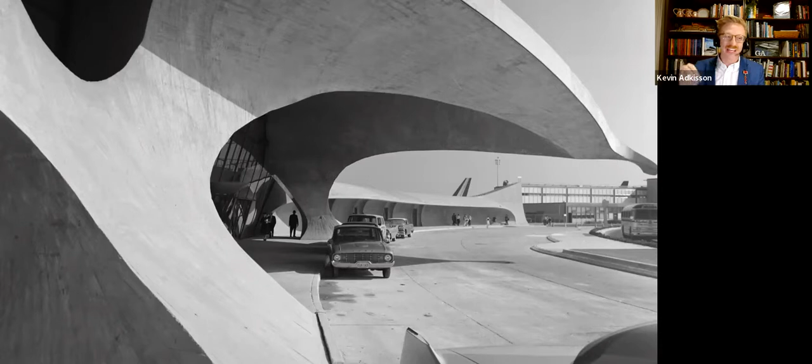As you get out of your car, you are sort of passing 1950s tail fins into an architecture that is equally swooping and curvaceous. The concrete formwork is left exposed, and you get a sense of not only how the building is put together, but also just the sheer weight of this great concrete bird. There's a New Yorker cartoon where two pigeons are sitting looking at a sketch of the terminal and it says, 'Poor bird, too heavy for liftoff.' And so you understand the sort of compressive force of the building as you move towards the front door.

In most of the PR material, TWA advertised that it was just one door from car to plane. And when you cross this glass threshold, you go from the swooping, curvaceous exterior language into an equally swooping and curvaceous interior language.

The building is predominantly a concrete structure, but inside there is a mixture of concrete, sheetrock, plaster, and wooden construction. Yet as a visitor you'll never really know the difference, because the interior has been entirely sheathed in millions of tiny Japanese marble tiles about the size of a dime, creating a uniform surface. This creates a total effect of uniformity across the walls, the floor, and the furniture.

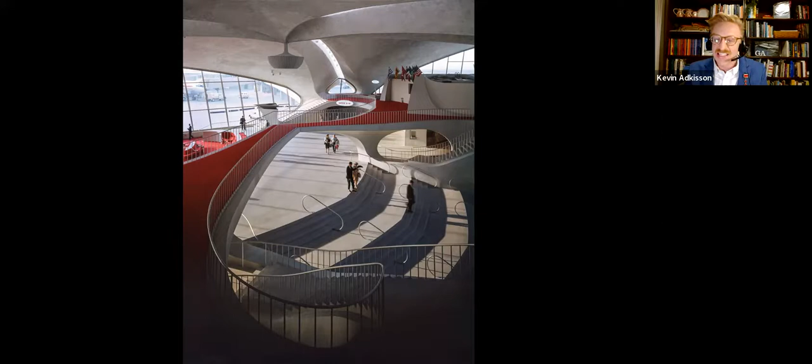But Scully would later reevaluate his opinion. In a lecture about the TWA Flight Center in the early 2000s, Vincent Scully said that the genius of what Saarinen is doing here is he's making, quote, those about to fly move calmly and intelligently from the tin can of our automobiles to those other tin cans out in the field, in order to be shut up in and flung out into empty space. What an irrational series of actions.

Anything could happen at any time. Scully says that the bravest people of the Middle Ages would never dare step onto a little airplane and go across the tarmac. What Saarinen is doing here is, in fact, steadying us for the journey. In Scully's words, everything about TWA Terminal says, you can do it. It's going to be wonderful up there.

I think there is this sort of optimism of not just the immediate journey, but the entirety of the American century. The building has an enormous sense of positivity and of grace and of beauty with this idea of the modern jet age.

Now, from the second floor of the building, you can look back down onto the check-in desk, or you can step into the Ambassador Club, which was the only interior that Eero Saarinen and Associates designed for the building. Coordinated by Warren Platner and working with Knoll Associates, we see a Noguchi-like fountain at the center with custom Eero Saarinen seats around the edge.

Elsewhere, Raymond Loewy designs a series of bars and restaurants like the Lisbon Lounge or the London Pub seen here. They are named after places that TWA could fly you, and they have a certain international flair. Now, below these lounges are some of the very first baggage carousels to ever be implemented in a US airport.

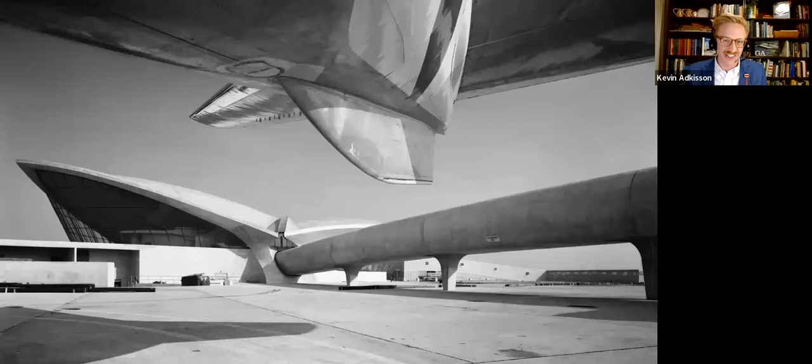Once ready to fly, you take this concrete tube, this windowless chute, out to the plane. TWA's own PR department called it 'the tunnel Alice followed to Wonderland—the flight center walkway leads to the excitement of air travel and distant lands.' You end up in what was called a satellite, also designed by Saarinen, featuring the same built-in furniture and tiles, then head out across the jetway toward your jet engine, given a last glimpse back to the flight center. The entire process is this incredibly theatric, dramatic allegory of flight.

Inside the plane, it's hard to differentiate TWA from any other airline, and hard to differentiate one bus-like row of seats from any other. So what Saarinen has given us is this entire journey from the car to the plane that is probably going to be substantially more exciting than the actual flight.

One New York City cab driver told a critic visiting the building, 'That's not just a building, Mac, it's a feeling—you get inside and you feel like you're floating.' There was a universal appeal; you didn't have to fly TWA to see the terminal, and about 50% of visitors in the early days were just there to see the building. It was a sensation and an experience.

Now that we've seen the building, I want to focus on what Eero Saarinen's office was like while actually producing this building, because they transformed the way modern architectural offices worked on design. As I've mentioned in other lectures, it was a brutal place to work—some 100 hours a week—and most people lived on their overtime.

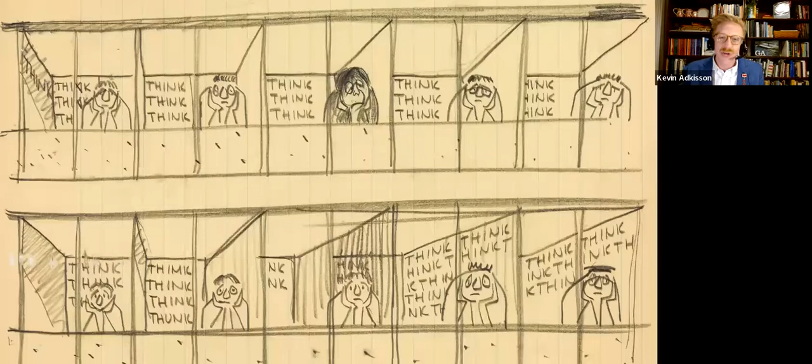In 1957, Eero hired a full-time cartoonist for the office, MIT-educated Swiss designer Claude de Forest, who documented such tortured activities as every architect sitting in their little office thinking about their IBM project.

For as much as everyone was overworked and over-intellectualizing all the buildings, it was also a transformational time in how they were thinking about buildings—they transitioned from using drawings and sketches to working with models.

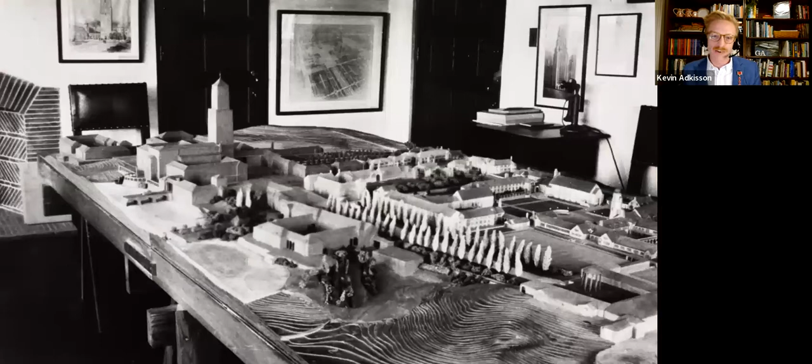Models had been used by Eliel Saarinen and Loja Saarinen when representing the Cranbrook projects. Here is a model made by Loja and her son Eero of Eliel's designs, but these models simply showed buildings that had already been sketched.

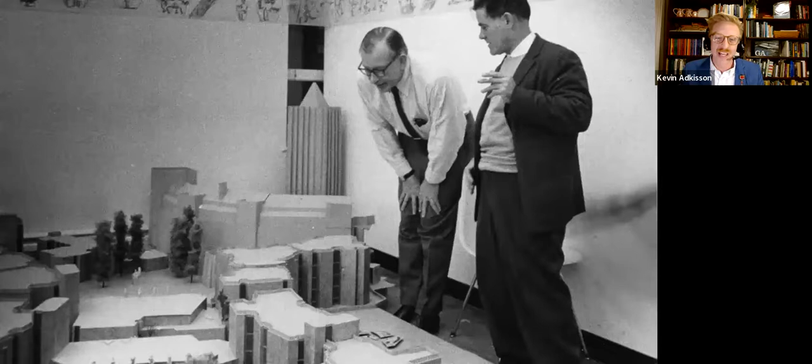What changes with TWA is that the building is never sketched—instead the architect and junior associates work entirely in a model. Everyone worked with models, and young architects were jokingly called the fledglings, referred to as cardboard cutters. Models were made of paper and chipboard, and they were really working devices, not meant to show the finished product or to show the client what the building would look like.

They were used to help design, like Eero here working on Morse and Stiles Colleges, or here cutting up the model of Dulles Airport to figure out the design in three-dimensional form. The models became increasingly large, and they had a system of cardboard and mirrored periscopes and rolling wheelie chairs where they would roll through the projects and peek in with a periscope to understand the architectural space.

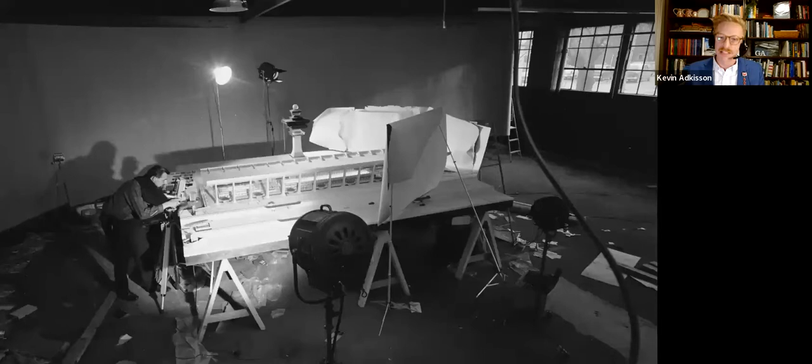As designs were refined and iterated, they were documented by photographers like Richard Knight and Balthazar Korab, and these photographs could then be used to showcase the building to the client. As the projects got bigger, the office moved locations—first above a gas station on Woodward, then to a former Jaguar dealership on Woodward.

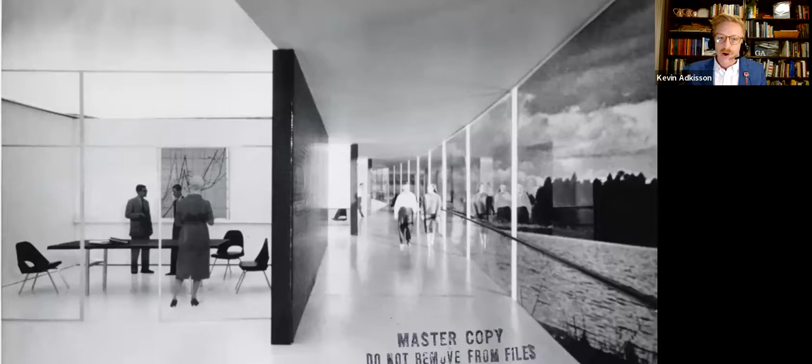And these model photographs were really quite effective at showing the design of the building. While the mostly male culture of the Saarinen office was working on these models, we also have the continued influence of Aline Saarinen.

I'll talk more next week about how Aline really served as a foil to her husband and transformed Eero's professional practice. She quit the New York Times in 1955 to become head of communications at Eero Saarinen Architects. She hired Pat Burley as an assistant to organize the photo collection and manage press inquiries. Aline begins to arrange engagements, lectures, publications, client meetings, and social events for her architect husband. She really helps transform Eero Saarinen into one of our first architect as celebrity, or what would come to be known as a starchitect.

And I think a tribute or testament to the success she has is when Jacqueline Kennedy invites the Saarinens to the inauguration in 1961.

Now, the office wasn't all work. They had enormous parties with favorite games like listing your 10 favorite architects and then defending why those are the best. They also threw parties for the old architectural models, whether burning them in a bonfire, or one of my favorite parties I wish I had a photo of, where the TWA models were used as chip holders and silver awards from the project were used as the dips. They didn't think to save the models because they were working devices, so none of these models survive.

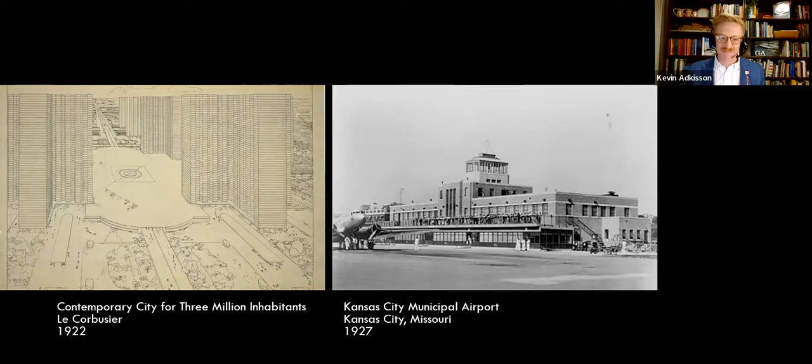You can see in Le Corbusier's vision, on the right, he has this circular airfield surrounded by towers in the park, and on the left, the business district. It was an ideal vision of the future where air travel would be intimately connected to the very city that it served.

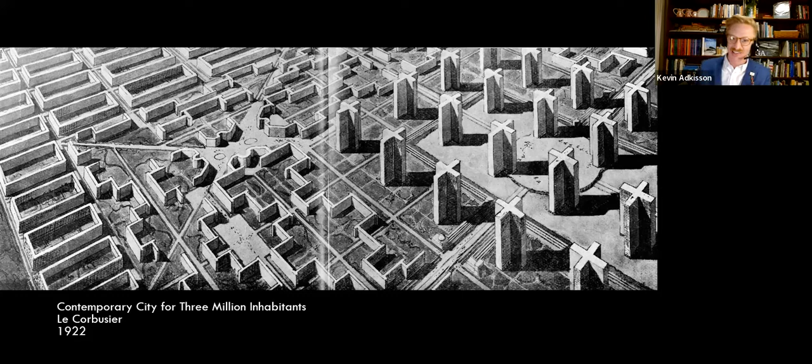Closer to home, Lloyd Wright, the son of Frank Lloyd Wright, proposed a circular airfield for Los Angeles, where airplanes would take off in any direction across a circular field and then land at a huge circular terminal built in his father's prairie style.

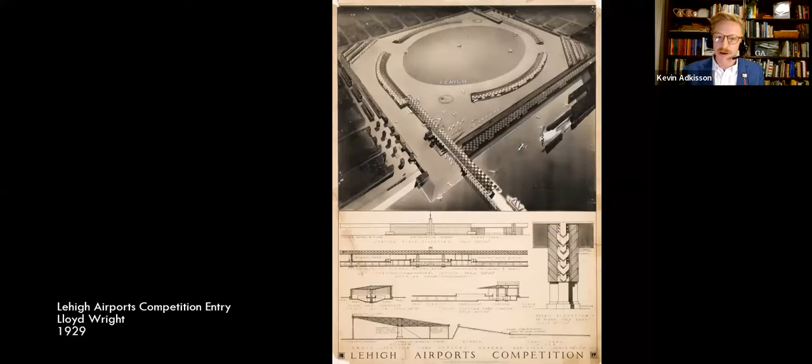This circular airfield, which many different architects envisioned, would become a reality in what is considered the first modern airport, Tempelhof Airport.

This was commissioned by the fascist government, and there is an association between militarism and aviation, where the technology that allows the jet age, that allows commercial flight after World War II, is coming out of the war. So while Hitler and his architect Albert Speer envisioned this as a gateway to a horrific vision of Berlin, it does serve as the model for most post-war airports.

Tempelhof uses a system where a large public plaza leads into a series of offices and hotels, and then a huge terminal, the largest airport in the world, leads immediately through to the airfield, where airplanes, seen here during the Berlin airlift of 1948, US planes are taxiing under the actual terminal, under this huge roof, solving the problem of how you get from an airplane into the terminal, which will become Eero Saarinen's great challenge at TWA.

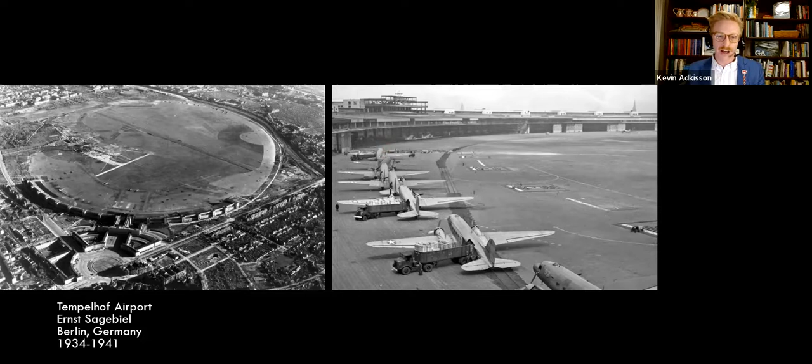In New York, Mayor LaGuardia opens the New York Municipal Airport in 1939 with a rather conventional classical Art Deco building by his favorite architects, Delano and Aldrich. The classical language of the architecture has an innate contradiction to the modern travel of air behind it. LaGuardia's airport was the vision of the future for New York air travel, but it quickly became too small and too limited for future expansion.

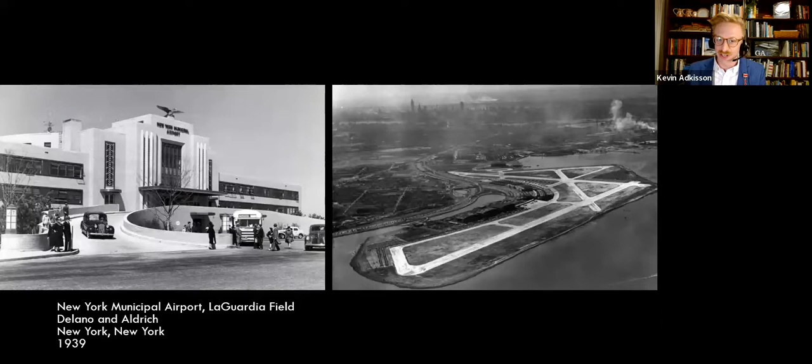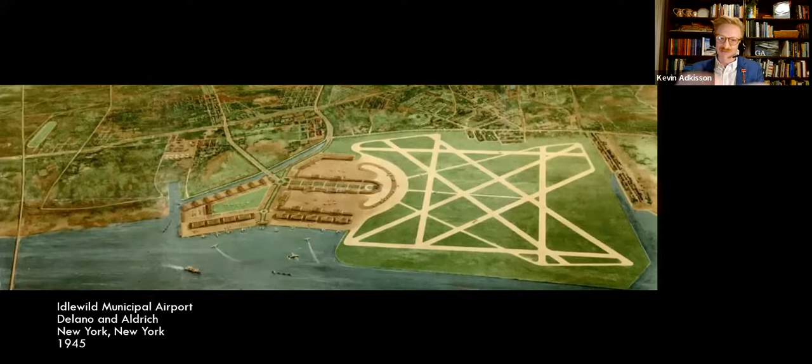So LaGuardia commissions Delano and Aldrich to build a new airport on 6,000 acres of golf and marshland. LaGuardia will be voted out of office in 1945, and the next mayor looks at this classical Beaux-Arts Roman scheme of an airport and hires modernist Wally Harrison to come in and redesign what will become Idlewild Airport, JFK.

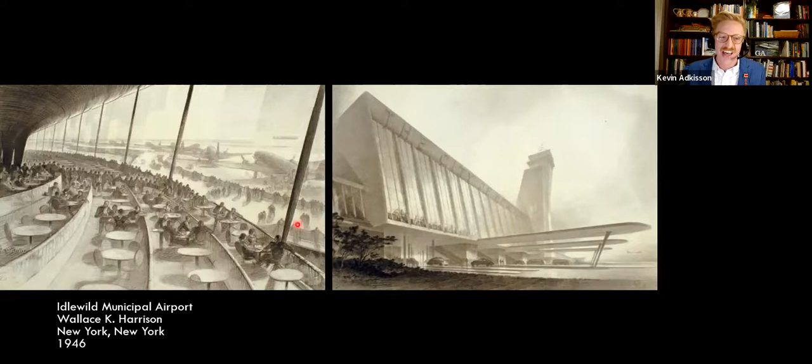Wally Harrison had been associated with Raymond Hood in the design of Rockefeller Center. He had worked on Radio City Music Hall and the United Nations building. He's a foremost New York modernist, and he proposes here a terminal where you would drive in on the highway underneath the building, be whisked up by escalators into a massive arrivals hall, and then sit and watch the drama of the airplanes along a huge Baroque peripheral building.

You can see this Baroque shape, this amoeba shape. This is all one single building with 86 planes docking alongside it within a radial system of runways that allow airplanes to take off in any wind condition.

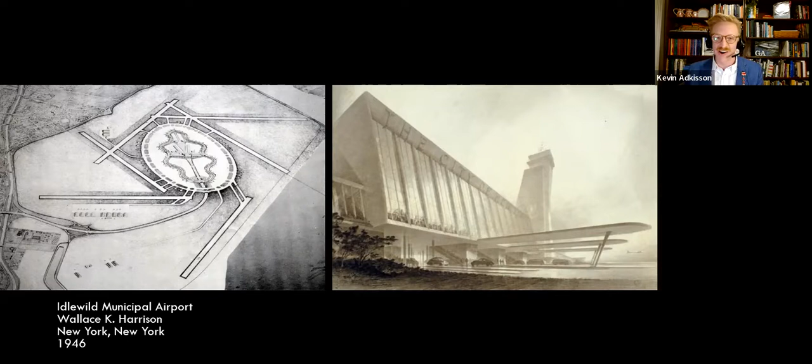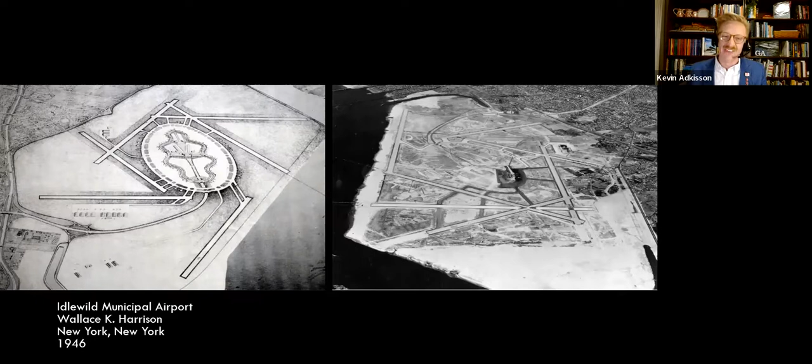Construction began on this project without funding for the building, so a temporary terminal was placed in the middle of these radiant runways before Wally Harrison redesigns the project on the suggestion of New York City, the Port Authority, and the airlines. He calls the idea Terminal City, and in 1954, the Port Authority of New York decides it will build the International Arrivals Building, and then individual airlines will build, like a shopping center suburb of air terminals, individual buildings around a central garden, Liberty Park.

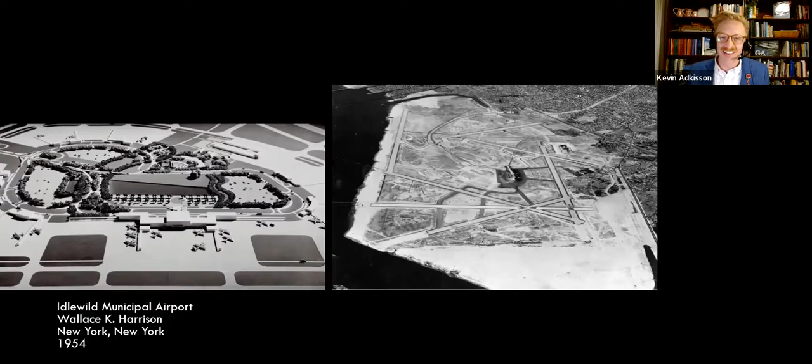Now, the entire thing will be connected by the Van Wyck Expressway, and we see here in 1958 the start of Terminal City. Now, in the center is this sort of Palace of Versailles garden that quite quickly gets paved over for additional parking. But the first buildings that open are the International Arrivals Terminal.

Designed by the august modernist SOM, it features a sort of functional glass and steel building in the manner of Eero Saarinen's General Motors Technical Center. Its most distinguishing features are the control tower and this arched arrival hall, which is a very simple steel arch with concrete reinforcing. It is successful without being particularly inspiring. This is what the government has paid for.

But when it comes time for the individual airlines to build their building, Wally Harrison envisions that they too will do some sort of streamlined, efficient, modest architecture. But we are in a new age. Mad Men, Madison Avenue has taken over, and these airlines know that whatever they build in New York will become an ambassador of their brand, an extension of their airline's identity.

It's part of a larger process in the post-war period that Architectural Forum calls the corporate showpiece movement, which started with the Lever House, where the soap company builds a giant glass building that they wash with Lever soap, or where Alcoa Aluminum builds a skyscraper out of aluminum, or Inland Steel sheathes their building in stainless steel. It is an idea that a company's building is a component in their corporate marketing, and that the corporate image is also the building's image.

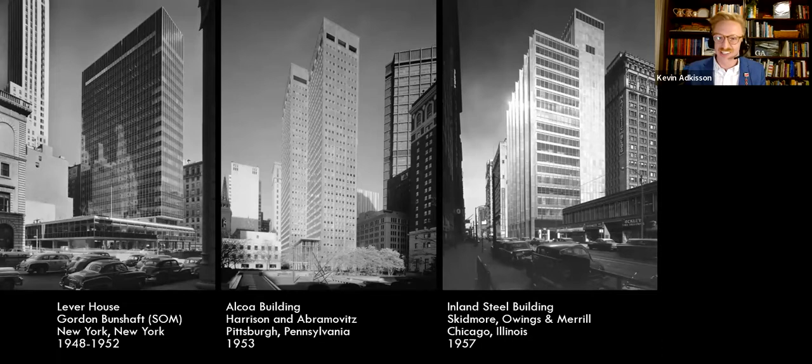It extended from large buildings, large corporations like these, down to individual companies where McDonald's becomes iconic for its use of this version of mid-century modern architecture to associate the hamburgers with this building. And it is a way of organizing corporate communications, of using architecture to sell your product, like the 76 gas station, where the sweeping curves of the architecture—how could you not fill up here versus a much more mundane building down the way?

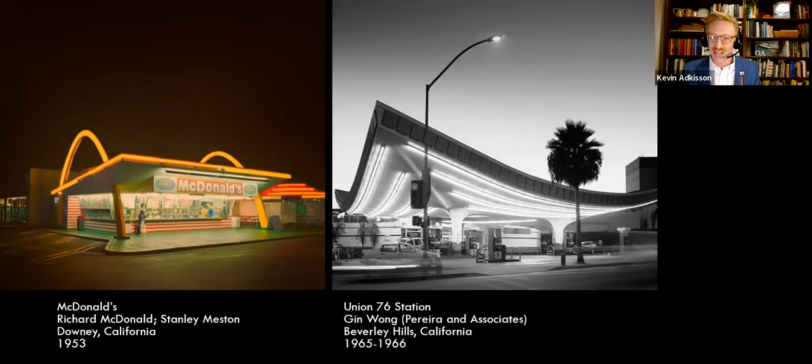Eero Saarinen is probably the most celebrated figure of this corporate architectural turn. And he had already created buildings like the General Motors Technical Center, where the car and the building are a unified expression. Or in Moline, Illinois, where John Deere, a maker of tractors that sit out in the landscape, occupies a headquarters of Corten Steel sitting out in the landscape. Or IBM, where the blue surface pattern is coming from IBM's punch cards that they're using inside, now expressed on the building.

So for TWA, how they actually choose Eero Saarinen—it is not the president of the company, it's not Howard Hughes, it is in fact the head of the PR department who suggests Eero Saarinen, because he says that air travel must be marketed like a consumer product, just as if it is a cake of soap. And so he wants an architect who can give him a differentiated signature building.

At the time, 1956, when Eero is commissioned, TWA is most associated with its Lockheed Constellation. This was the airplane that TWA had invested in during World War II, and they were the first to take it into service in 1943. It was iconically associated with TWA, and as the jet age arrived, TWA missed the mark. They did not order any Boeing 707 or Douglas DC-8s, and so they were stuck with these older planes, and they were searching for an architecture that could replace in the public's mind the Connie constellations for a new expanded market.

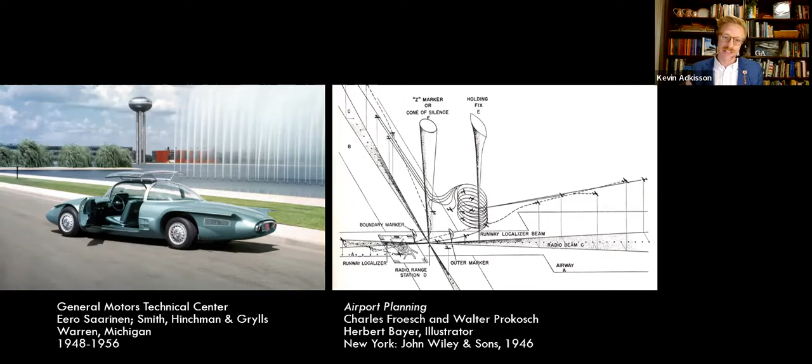He's really limited to one book, because there is only one book on airport planning: Walter Prokosch's Airport Planning, which is the guideline for what a jet age airport might be. Saarinen realizes that TWA, in their guidelines of what they want in a terminal, have copied word for word, plagiarized, what Walter Prokosch says should be an airport. So Saarinen realizes that his client doesn't really know what they want, and it's up to him to discover how the architecture will best serve TWA.

Saarinen, who was always traveling, starts doing research. As he travels, you can see him here putting a stopwatch into his coat. He is taking detailed notes of the entire process of air travel. As he goes around the country, he measures not only airports but also train stations. How long does it take to get places? He hated being delayed in that liminal space between the car and the airplane or the train. So he would time how long it takes to land, to taxi, to deplane, to get your bags, to get into the cab. And he uses this analysis in the design of the TWA terminal.

They create some 40 pages of documents detailing everything that will help in the transformation of airports, transitioning from facilities that handle airplanes to facilities that handle people.

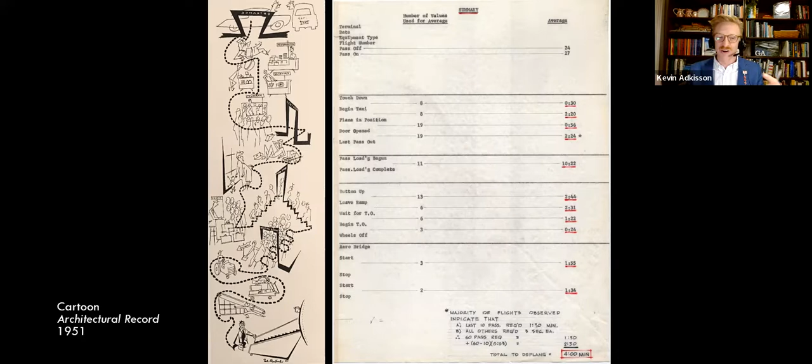He realizes in his travels and research that airports are terrible, and everyone knows it. Here's a cartoon from Architectural Record that shows the drama and trauma of moving from the car to the airplane, as our little figure moves from top to bottom, tumbling and becoming more disheveled, until from outdoors he climbs into the airplane. One critic said, in the air the consumer may be treated like a king, but on the ground he has to fight his way through a chamber of horrors. There is just a great level of disorganization in modern air terminals.

It's really a way of managing people. And we can see how at TWA, as we walk through it, those flowcharts that Eero Saarinen drew in research become exactly every stop as you moved through the TWA terminal.

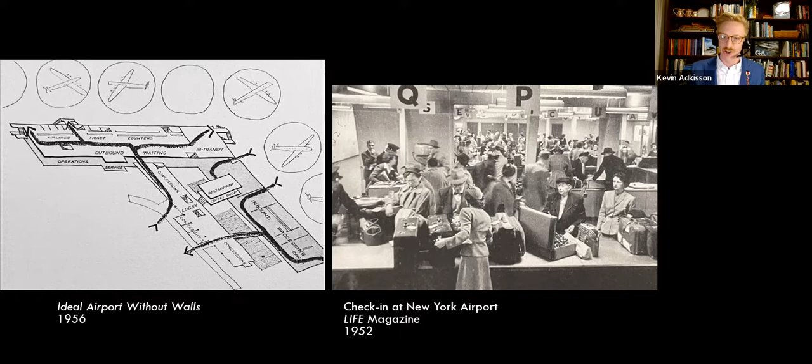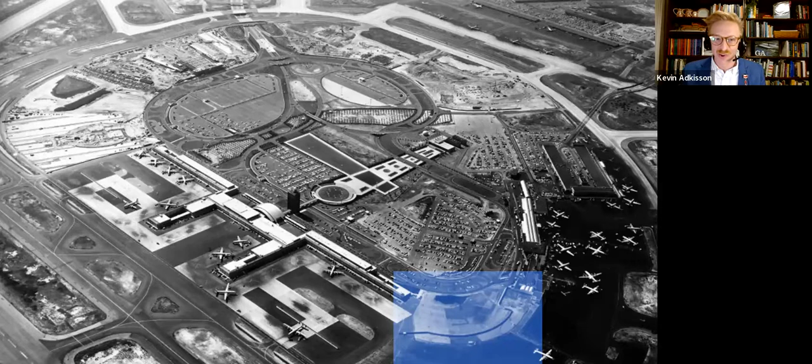When he is given the site, TWA was a little disappointed because they were here in a corner. But what Saarinen liked about this corner was that he had both a more dynamic street frontage, because his building would be entirely along a curve and not a straight part of the road, and also it would be directly on axis with the entrance, which inspires him to come up with a fully symmetrical building.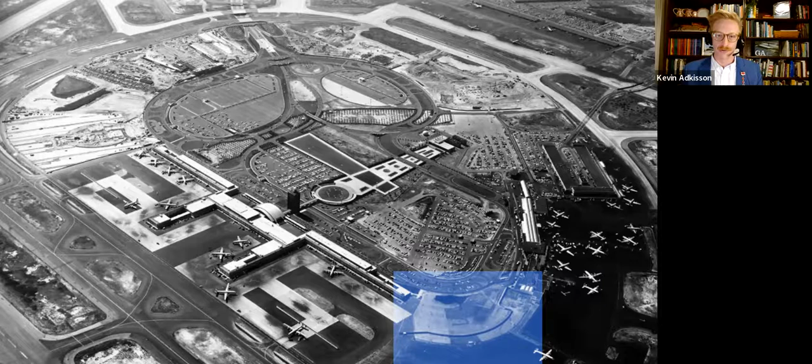Now, there's only one known sketch of the TWA terminal, but here we can see his idea of a large single roof that houses everything needed for the passenger terminal.

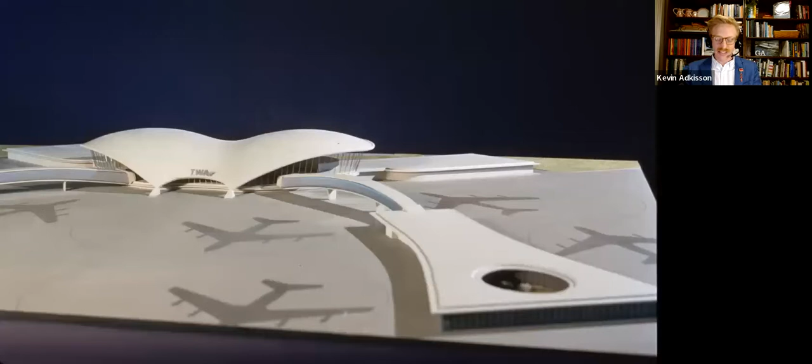He quickly transitions from working in sketches to models, and they create the first design in late 1956 with this monolithic, undulating, biomorphic roof that leads out on little piers to satellites that would allow you to board the plane.

As they're working on this design, Aline and Eero take a month-long trip through Southeast Asia. We can see here Aline on one of the propeller planes they used to travel to Southeast Asia. And in January of 1957, the Saarinens arrive in Sydney.

Saarinen was invited to be a judge for the new Opera House competition. He shows up and says, 'I'm late, my plane was delayed in Fiji.' And he looks at all of the entries and says, 'Is this everything? These are terrible.' He goes through all of the rejected entries and pulls out a submission from the Danish architect Jørn Utzon, and says, 'This is your winning design.'

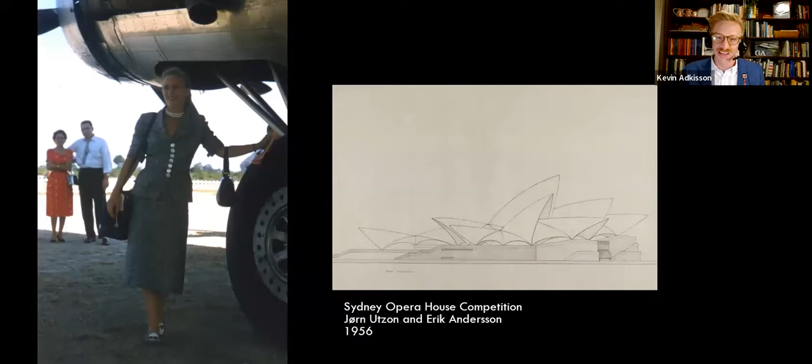But he has to convince the jury and the governor, and they are not compelled by this shape of concrete shells. So Saarinen, realizing the iconic value of this design, takes out his own set of pencils and redraws Utzon's plan to help convey what these large concrete thin shell structures would actually feel like as you looked at them in Sydney Harbor.

He convinces the jury to award the commission to Utzon, and Saarinen has really set out to create the iconic image of modern day Sydney.

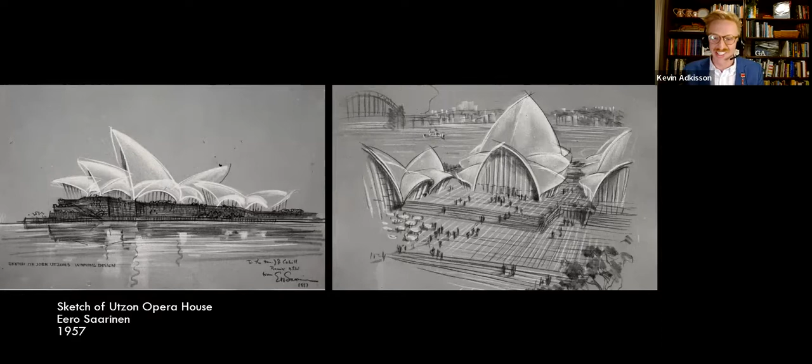On the flight back, he's thinking about Utzon's design, these thin concrete shells with their crisp folded edges, and about Norse helmets. As the story goes, he sits down to breakfast with Aline at their Bloomfield Hills house, and she asks him to describe how the work on TWA is going. He looks at his half a grapefruit for breakfast and begins to rip it apart, unfolding it into the shape of the roof.

He takes that little grapefruit to the office where they turn it into a clay model at 6 inches, then it goes up to 15 inches until they get to massive models. Here you see Eero and Kevin Roche working on the structural systems of how this complicated roof form might actually stand up. César Pelli becomes intimately involved in the project now, working again on these full-sized models.

They take the design to the executives at TWA, and Eero would later say he never thought the building looked like a bird. That was never what he was going for. He would say, 'If the public sees a bird, how wonderful. Architecture should convey meanings, but I was never envisioning a bird. I was envisioning structure.' However, in the presentation pamphlet for TWA, you can see it's not a rendering of the building, but a photograph of birds taken by Balthazar Korab that actually advertised this for TWA.

Now the company is enthusiastic, they approve the design, and Saarinen goes to his trusted engineers at Ammann and Whitney to create the structural system.

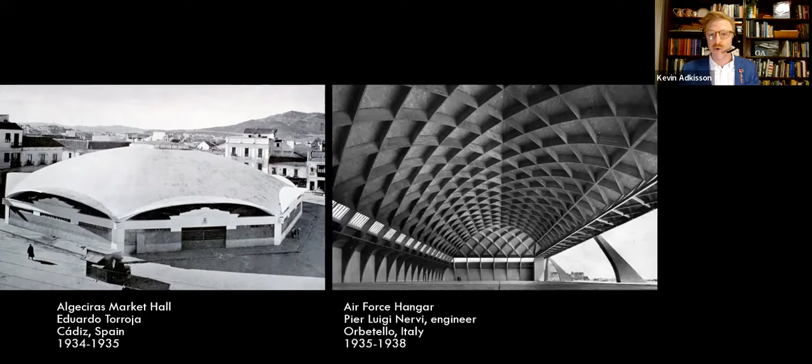What exactly is a thin shell concrete construction? They date all the way back to the 1920s, meant to span large volumes of space with a minimum amount of material and with no columns. Early thin shell constructions, like this market hall in Spain, are just 3.5 inches of concrete thick, covering 180 feet of empty space. Engineers like Nervi in Italy will transform the thin shell concrete construction into something much more expressive than just a concrete form, bringing a certain dynamism to the engineering.

Or in Mexico, Felix Candela becomes America's master of thin shell concrete construction with his churches, factories, and other buildings in these swooping catenary arches. Now, Eero Saarinen will say that yes, he's aware of these thin shell constructions, but he's also looking at designers like the Spanish-American Guastavino, who uses clay tiles coated in concrete to create thin concrete shells.

But the building Saarinen is most thinking of is probably the most famous airport in America at the time, the recently opened St. Louis airport, designed by Minoru Yamasaki. Yamasaki thought of his thin-shelled concrete vaults as parachutes, allowing light in between and covering this large clear span space. What Yamasaki was trying to do, and what Saarinen says he doesn't do, is create a vault that feels more like it's being held down than being supported. Eero Saarinen said this airport was grounded.

He wanted vaults more like those by the great English architect Sir John Soane, where you see the vault and it feels almost as if the columns are actually holding it in place instead of supporting it up. Saarinen says what Yamasaki has done are heavy grounded vaults, or domes, and if he wanted a heavy grounded dome, his at GM was better because it had a brick wall. That seemed to be the logical way for a vault to grow.

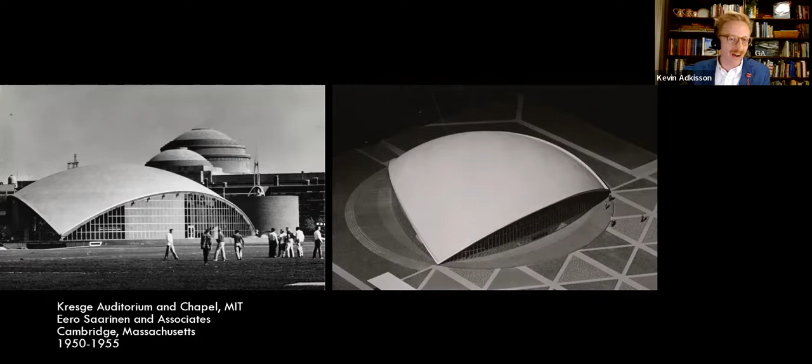And the problem is that the dome, if you look at these domes from the early 20th century, a dome wants to have a constant footing. It wants to land in a circle. And what Saarinen does is he has a very conventional dome up to this point, but then the forces of this concrete shell, this membrane, are going to start going all out of whack. And there's no way for the engineers to measure, without computers, which they don't have, the forces of what actually is happening here, how the load is transferring down to these arches at all of these different dimensions. And so the dome is not based on any sort of structural logic, and it in fact defies every known principle of membrane thin shell concrete construction.

And when they go to build it, it immediately starts to be complicated by the fact that the Saarinen have told their contractor to build it however they feel. They don't control how the concrete is poured. They don't control the method of the formwork's construction. It's poured in the dead of winter over 3 months. They allow the concrete to cure at each level, so there are cold joints of concrete going up. And they also are not able to sort of keep the concrete in this sloping position.

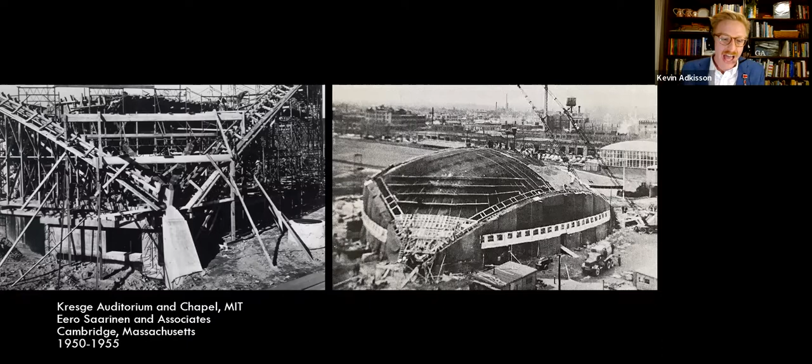And so when Harper's Bazaar comes to run a profile on Eero Saarinen, and they do this sort of heroic great architect piece, of course none of his circle, none of his team are in the photo shoot, but he is looking at this brand new concrete thin shell construction resting on these dramatic 3 arches. And what he doesn't tell Harper's Bazaar is that at the time of this photograph, he knows that the structure has failed. They start taking the shoring out of the building and it starts sagging beyond an allowable limit.

And so what they have to do is put in steel reinforcing under these arches. They did not get it to work where it actually supported itself. And so the principles of a thin shell concrete vault are no longer actually functioning here at the MIT chapel.

Now, Charles Whitney of Ammann and Whitney spoke at MIT in 1954 on the Conference of Thin Shells, and he said at the time, he just doesn't mention the project. And then he says that building has no general rule as to their justification. And I think Saarinen learns his lesson. He says the dome is too earthbound. He admits the structure didn't work.

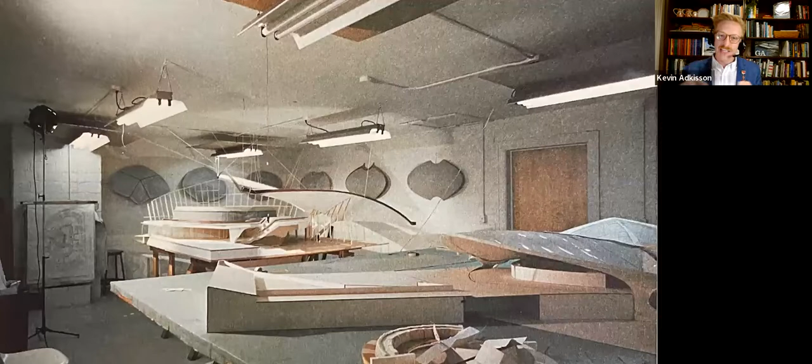And so when Abba Tor is looking at this building and saying, this is never going to work as a structural system, Saarinen gets angry. And then he says, well, what do we do? And Abba Tor begins to sort of bring himself into a full part of the design team. And the great change that occurs as they build these models is they split a monolithic roof into 4 individual sections. Those 4 sections then act as individual thin shell constructions that are supported on their own columns. And so instead of having one large sheet of concrete that is going to have immeasurable forces, they have sort of arches that are both arches and domes that they're able to actually run calculations on.

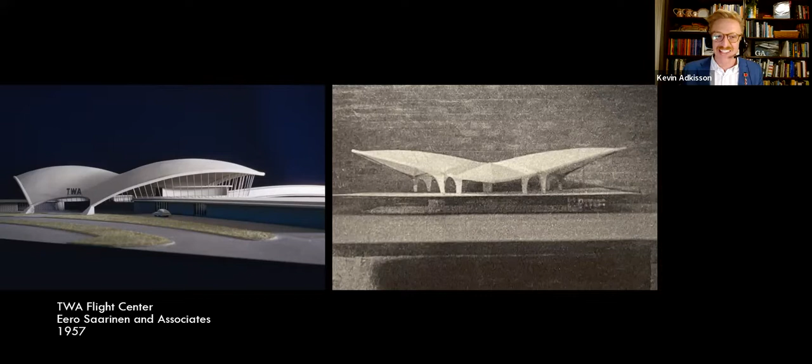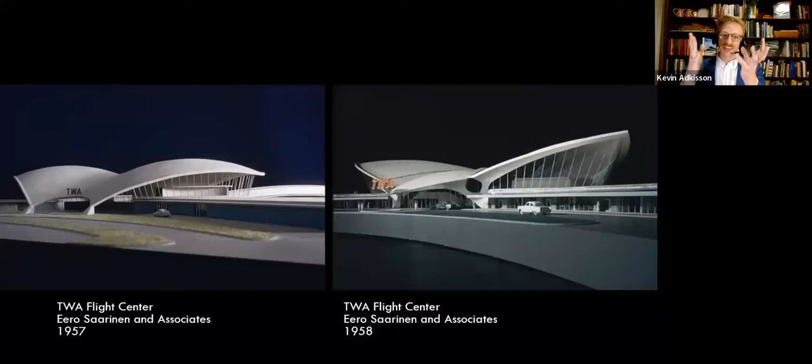The problem becomes how these suspended vaults or concrete shapes actually meet the ground. Saarinen called this the cockroach airport because of its 8 little legs. And they eventually settle on a series of just 4 points of contact where Y-shaped concrete buttresses will grow out of the earth and then support this entire concrete structure. And this is the sort of great gesture of TWA that makes the building both bird-like, but also seem like it is soaring out of the asphalt.

Now, the models are photographed and they are published, and the building becomes a celebrity in and of itself well before they have figured out, can they build it?

And if so, how will they build it? They take their models and the model photographs and slice them up, as Abba Tor says, like salami. They take these slices and do all their engineering calculations on a slice, then combine all the slices, and if everything equals zero, they think it should stand up.

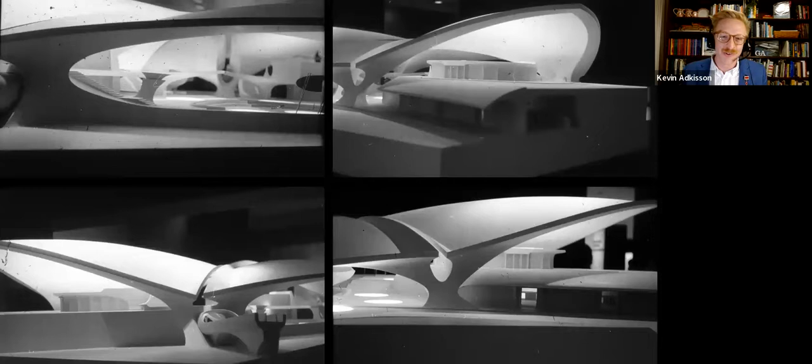Now they continue to refine the design of the building with these models. And as they do, Claude DeForest comes up with a whimsical little cartoon showing a traveler moving through the airport who, hitting these concrete curves, has become decapitated on his journey to the airplane.

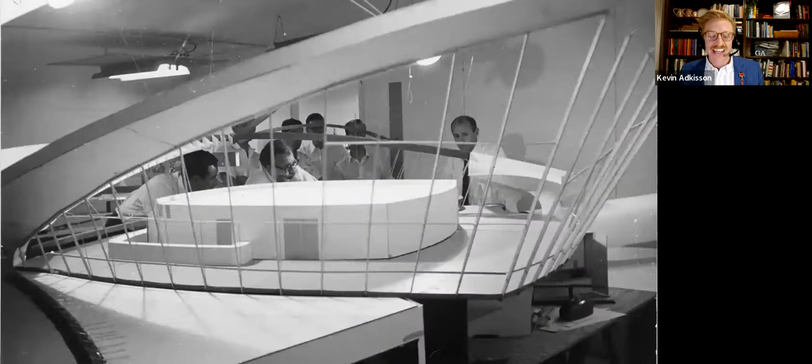Now the models themselves become how the structural engineers are able to create the design drawings. The Saarinen firm was working at full scale, working in the model. Here you see Saarinen's legs popping out of the model. As they would tape these sheets of paper, they would be photographed here by Balthazar Korab and sent to the engineers who would turn them into construction documents.

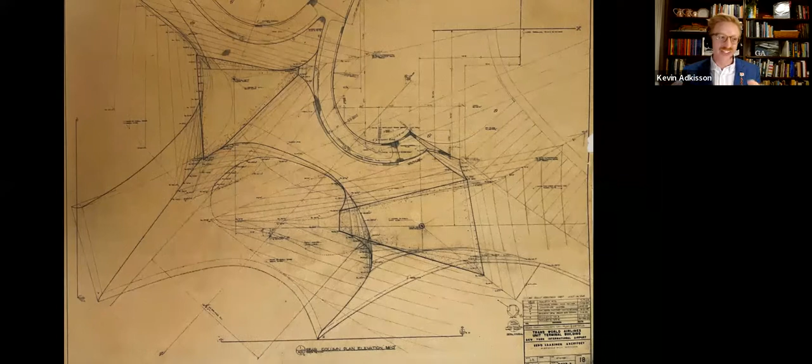Now, as a contractor looking at this drawing, I would have no idea what to do next. So the contractors Grove, Shepherd, Wilson, and Kruge have to approve the entire construction system before they're able to break ground. They end up producing about twice as many documents on how to build the building as Eero Saarinen and Associates produced telling them what the building should be. So they end up creating nine months of manuals on how to actually create this structure.

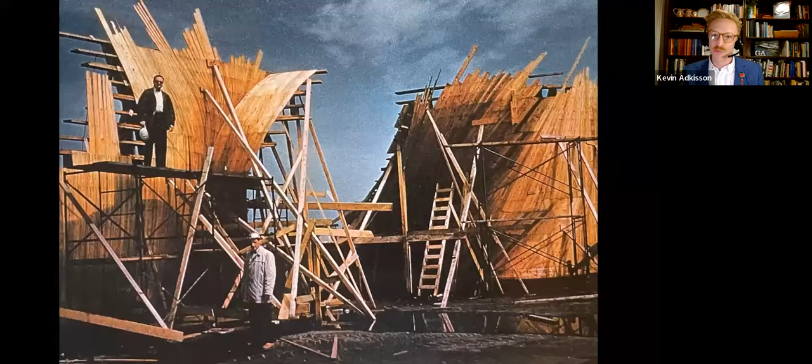So the first task of actually building TWA, after they have driven all the pilings—remember it's a marsh, so they're putting pilings into the earth—they're doing them at an angle because the forces from the roof will be coming down at an angle. Then they start building wooden formwork, using carpenters to create the entire air terminal in wood as the mirror image.

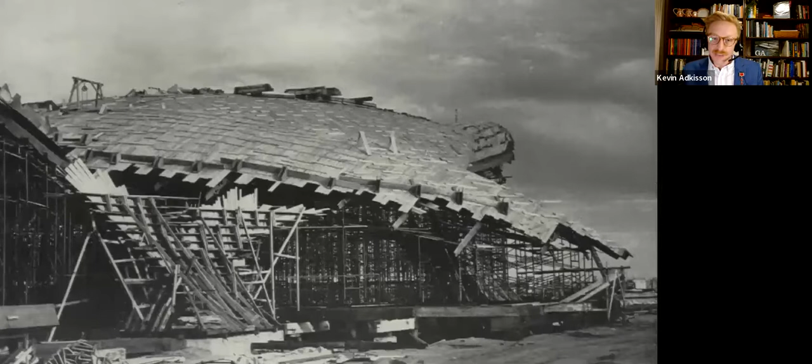Now there were no computers used in the calculations of the actual concrete structure, but there was a very early computer used to create the scaffolding. There were some 5,000 pieces of steel that supported this enormous wooden structure, which would become hugely heavy with wet concrete. And so the cost of the roof was about $15 a square foot, and more than half of that was from the formwork.

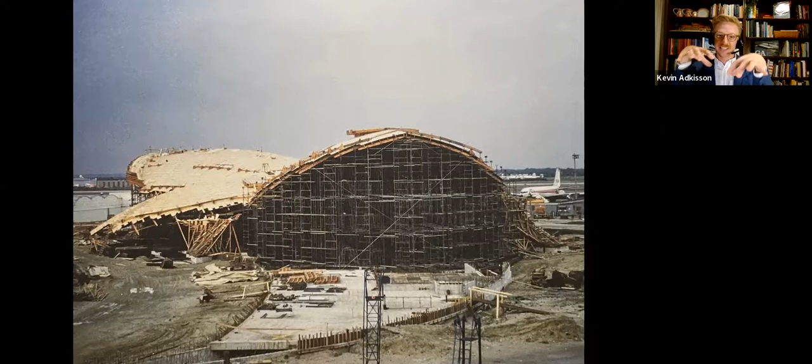They couldn't reuse the form because the whole thing had to be built at the exact same time, or it would fall over, because the four quadrants are connected and resting on each other. If they were to build one piece of the quadrant on that Y-shaped buttress and then try to reuse the formwork next to it, it would completely collapse without its counterweight of the other concrete part.

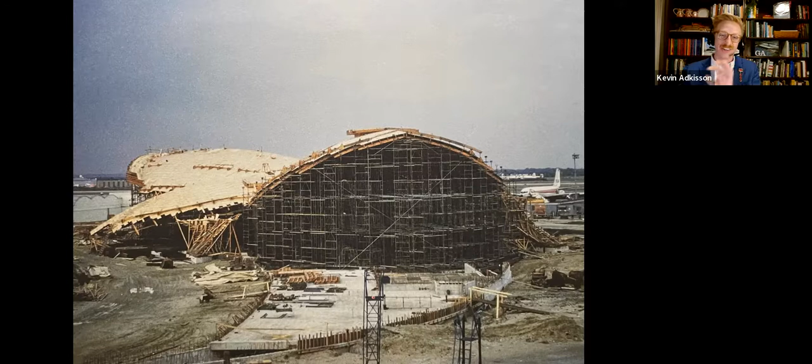Now the actual journey of building these 5,000 tubular steel frames, holding some 2,500 wedges on 27 different shapes, and then countless individual wooden pieces, was a multi-month process. It took most of the first year of construction to build the concrete formwork. It was then coated in shellac and marked with spray paint, telling you exactly what type of concrete mixture and how thick it should be at any one instance.

Concrete is incredibly strong in compression, but it has no tensile strength. You can't pull concrete. So you add steel rebar inside of concrete to give it additional strength. Here you can see the steel rebar, which was its own engineering problem, laid out on top of the concrete formwork.

Now John Dinkeloo was on site in New York. When he told Tor, he said, 'Abba, if you don't pour the joint straight the way Eero wants it, he'll have your head on a platter.' And Tor told John Dinkeloo, 'My head will do him no good on the platter. My head has to stay on my shoulders, not on his platter.'

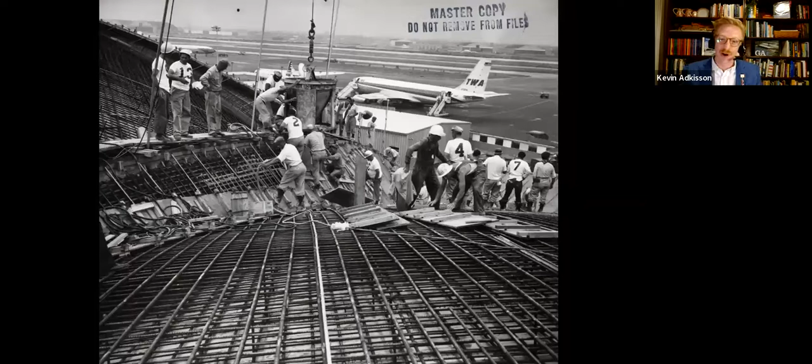He later would confide to an interviewer that, as the structural engineer, he thought this should work. Everything said it should work, but he didn't know exactly if it was going to work. And so when they start the concrete pour, it is a 120-hour straight process, because they cannot let the concrete dry from the start to the finish.

It takes 30 hours from pouring the buttress to pouring the top of the roof. They used a coordinated system where all of the workers in red and white shirts had numbers that told exactly what their role was. There were people with notebooks looking out and saying, number 4 should be right there at this exact moment.

Everything is going smoothly. The spray paint on top of the wooden formwork was complemented by spray paint on the buckets that told you exactly which bucket of concrete was meant to go where.

Inside, underneath the formwork, was a team of engineers who were looking at plumb levels, weights on a string, and watching how much those weights were shifting as the concrete is poured on top of the wood. They would radio up and tell the engineers above, it's too heavy on this point, we need weight on this point. Because everything was so coordinated, they could tell them exactly where the next bucket needed to go as the inside formwork is shifting under the weight of wet concrete.

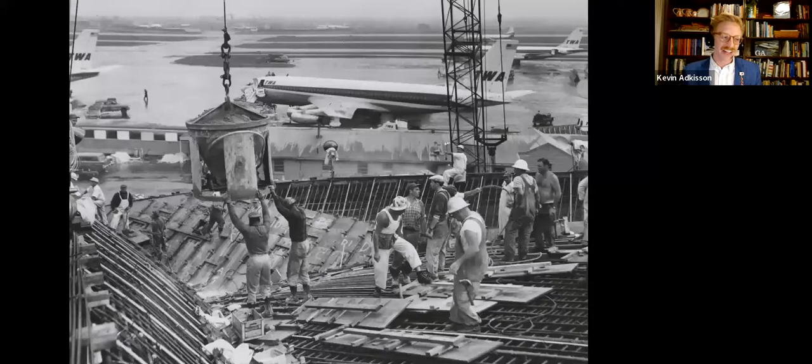They worked straight through the night under Klieg lights until they had poured all 4 sections. They finish it in September, and it takes until November for the concrete to cure. At the center is a 44-inch thick pentagon of solid concrete that joins together the 4 wings of the building.

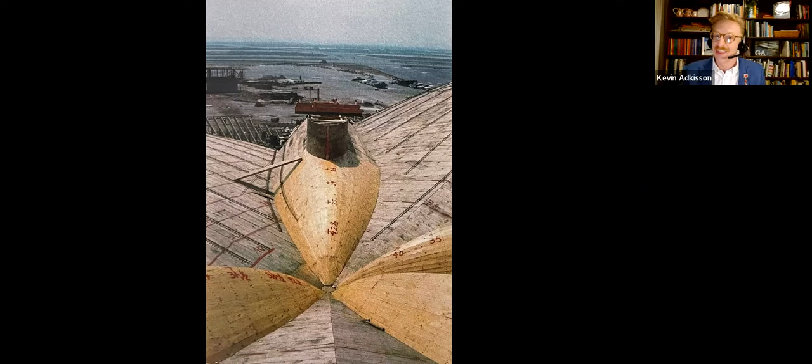When they get ready to take the formwork down, it is a process in and of itself because they have to measure how much the concrete is shifting and settling. Cracks had already begun to appear in the Pan Am terminal, and so JFK, the Port Authority, was very concerned with how this concrete monument, that no one quite knew if it was going to stand up, how it would work. They take the formwork down and you are left with this pretty incredible sculpture of concrete.

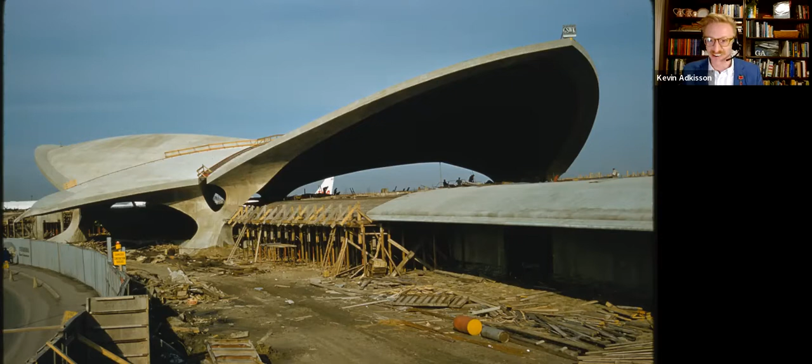It does stand up, and in the end, after 90 days, it has only deflected about 1/4 of an inch in places, 2 inches in others.

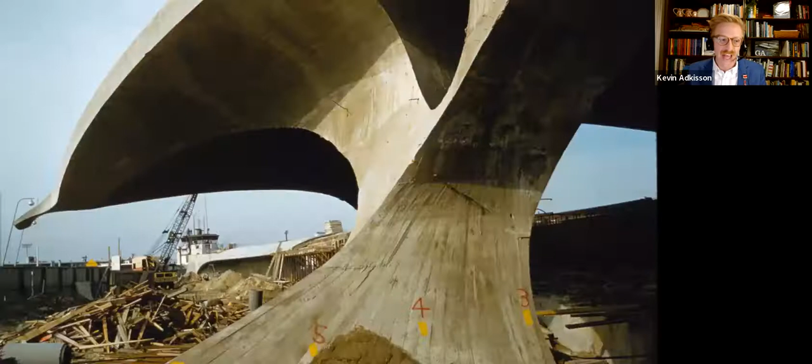As you get closer, you see the actual method of construction. You see the wooden formwork leading up to these wide buttresses. It's really just a pretty incredible sculptural form.

Eero Saarinen stood in this building in April of 1961, and he said, if they stopped right now, we would have a beautiful ruin like the baths of Caracalla. He looks at Abba Tor, his structural engineer, and says, if this were to fall on my head now, I would die a happy man.

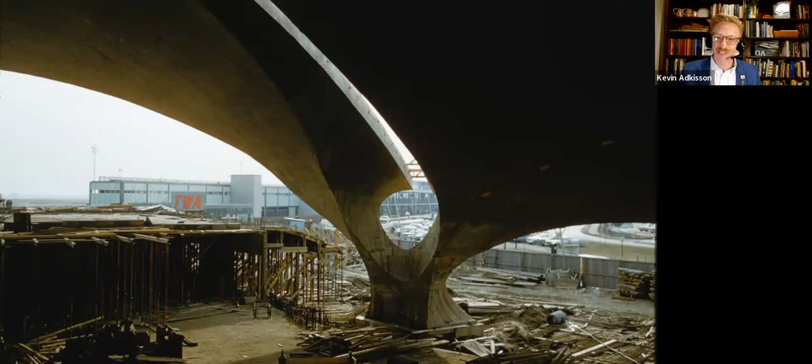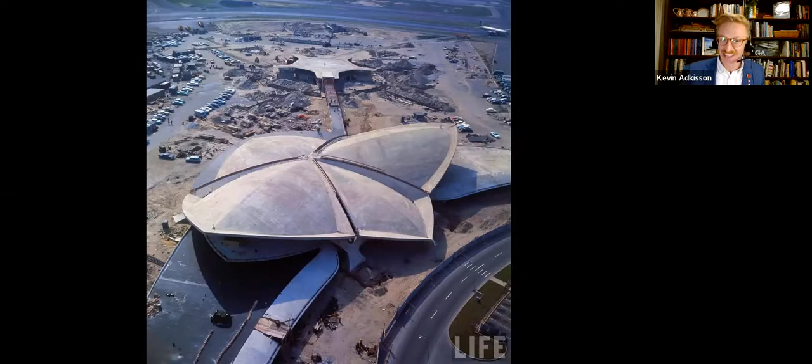Of course, it doesn't fall, it does stand up, and he is able to then continue the process of sealing the concrete roof with 1,500 gallons of silicone, and then outfitting the building with windows, asbestos spray on the inside for acoustics and fireproofing, and turning this large, not exactly thin shell - some places it's 44 inches thick - shell concrete construction into a building.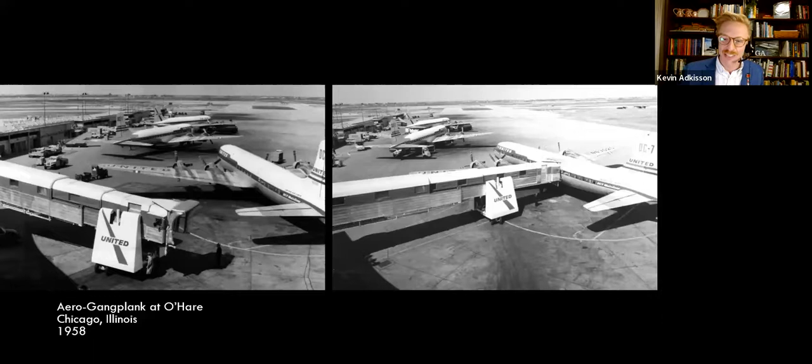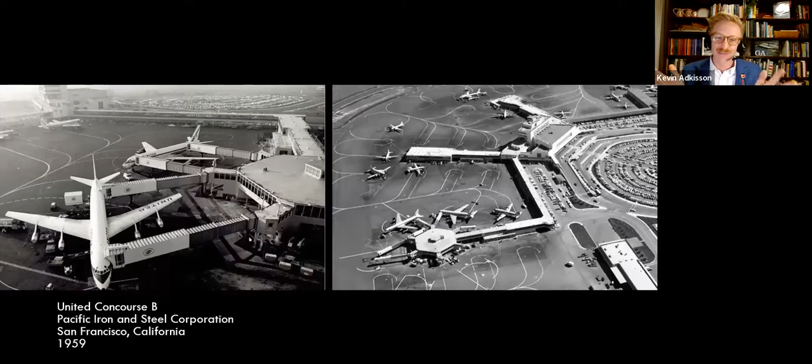There was one other issue left to resolve, which was actually how you got the passengers onto the plane. Kevin Roche and Eero Saarinen head out to O'Hare, where they see some of the first gangways, and they help convince TWA to use these new modern ways of going into jets. Saarinen looks at this thing and says, boy, if something goes wrong with it, we will have unhappy passengers. Today this seems like such a standard practice, but it was a pretty bold use of a new technology to actually connect the terminal to the planes.

In the end, you have this efficient sort of terminal where, starting from the car, you swoop in through the doors, through the lobby, and then out to the plane.

A year before they had finished the project, the PR and marketing team was going into a multi-million-dollar campaign advertising the new terminal. The TWA ad manager said, we advertised it as though it were a national monument.

Before the building is completed, Eero Saarinen dies in September of 1961. In March and May of 1962, as parts of the building go into operation, Eero will never see his finished terminal. The interior is outfitted by the Saarinen office.

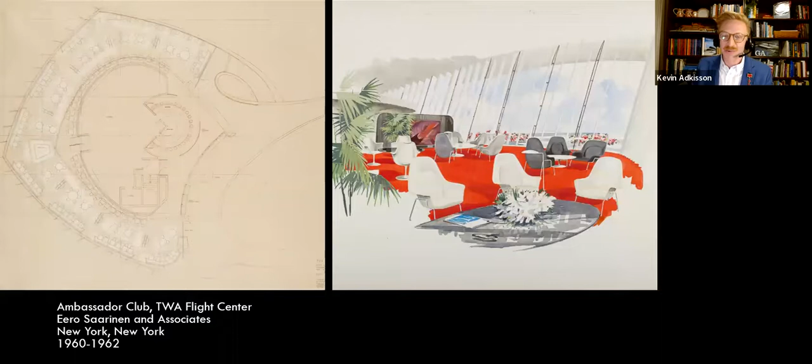They designed the Ambassador Club, which you can see had proposed womb chairs here, with the fountain that we saw earlier, while the rest of the interiors are designed by Raymond Loewy. Loewy had been commissioned to redesign not only the logo of TWA, but also the uniforms and all of the supporting infrastructure of the airline. It's Loewy who gives TWA its iconic red letters, and he also designs the cafes within the building.

Once the structure is actually dedicated, it is a huge popular success. TWA throws a multi-month-long dedication series of events, and NBC carries the entire event live on May 28, 1962, to a soundtrack of sort of Hollywood thriller music. They dedicate the new TWA Flight Center, and Aline Saarinen dedicates a small plaque in the center of the terminal to her husband. It becomes, as the PR team says, the winged gateway to the world of flight, a passenger's dream. Everything here adds pleasure to your journey.

In the architectural press, though, critics were a little bit more harsh. Peter Blake in the Architectural Record compares TWA to an enlarged Danish salad bowl. Meanwhile, Ada Louise Huxtable says that the modern traveler, freshly fed from frozen food, enters the city not in splendor, but through the bowels of streamlined concrete birds. It was not exactly the most popular thing among architecture critics, and yet the people loved it, and it becomes almost as iconic as Disneyland in the popular imagination, representing what flight and air travel might be.

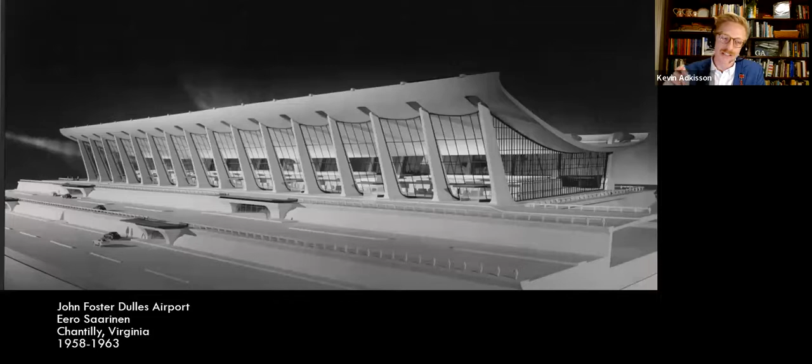Now, at the same time that Ammann and Whitney are engineering the TWA Flight Center, they are commissioned by the federal government to design a new jet airport for Washington. The engineers must not have been too scarred by Eero Saarinen's work at Kresge, at MIT, or at TWA, because they are assigned the role of hiring a design architect for the airport, and they hire Eero Saarinen. Dulles Airport becomes the great apotheosis of Eero Saarinen and Associates and Ammann and Whitney, of architect and engineer, where instead of being designed by Eero Saarinen as a sort of architectural model, as a form, and then engineered to stand up, the engineering and the architecture are designed at the exact same time.

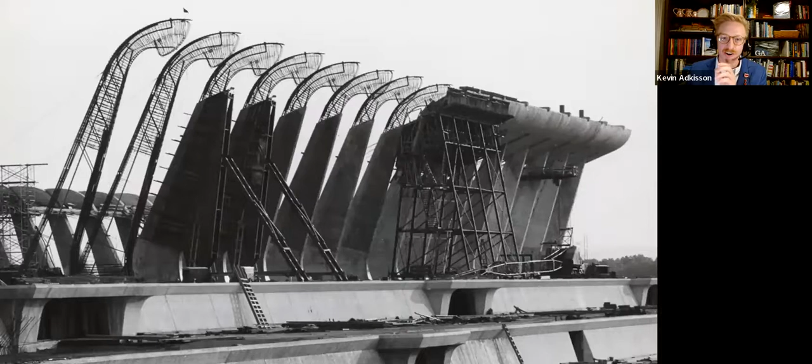Instead of having all custom woodwork, the process of building these canted steel-reinforced and limestone concrete columns was to first build the steel reinforcing rods, then move into place on railroad tracks these large formworks that could be moved from column to column, pouring the concrete of the base column, and then moving this scaffolding piece where you could pour the great beam that runs across these columns. The columns are 40 feet apart in the short direction, and 120 feet back you have a shorter column, which was then connected by a 1-inch thick cable.

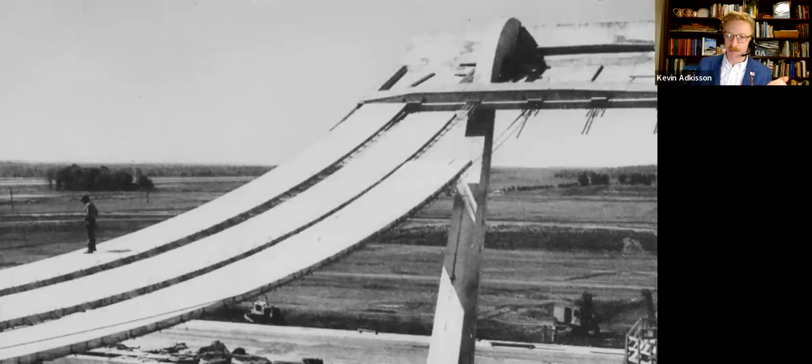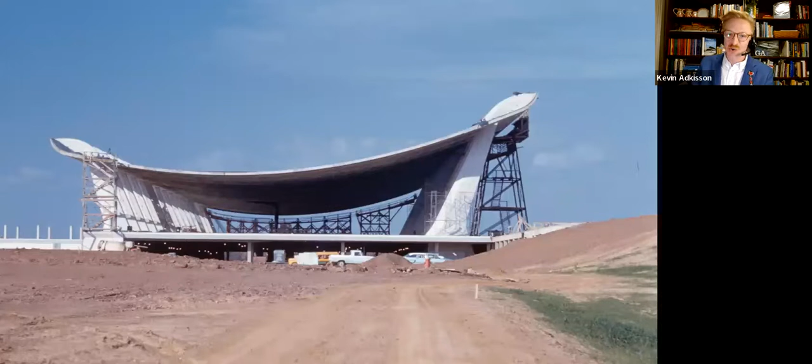Remember, Ammann and Whitney are bridge engineers first and foremost, but this is not quite a suspension bridge. It is, in fact, another version of a thin shell concrete construction. This time, the shell is simply hanging upside down. The cables were stretched across, covered by precast concrete panels, and then poured with a thin layer of concrete shell and covered by a membrane. It is really a very simple and sort of intuitive, almost tent-like structure. At the same time, it was a great engineering challenge, and Ammann and Whitney and the team really view this as the best relationship they have between an architect and an engineer.

Now, the building, as Saarinen's goal, reflects the federal architecture of Greater Washington. It doesn't have that sort of Jetsons appearance of the TWA Flight Center. It doesn't have what could be considered the sort of crass commercialism of TWA asking for a building that will be marketable. Instead, here at Dulles, Eero Saarinen and Associates came up with both a structural system that was more elegant and more refined and integral to the end product, but he also created an architecture that was appropriate for federal Washington. The landscape designed by Dan Kiley situated this great terminal out into this sort of gateway of the American continent. And it's Scully who says that Saarinen's greatest gift in these air terminals was knowing the sort of space of the American scene and then figuring out how to get us into it, to build airport terminals that are not just scaled to our body and to the process of boarding an airplane, but that reach out to something larger.

Now, before we conclude, I want to think about where these airports took us. If the jet age was here by 1958, and traveling was fashionable throughout the 1960s with different designers getting in on designing airports, airplanes, and uniforms, Saarinen would design one other airport in Athens.

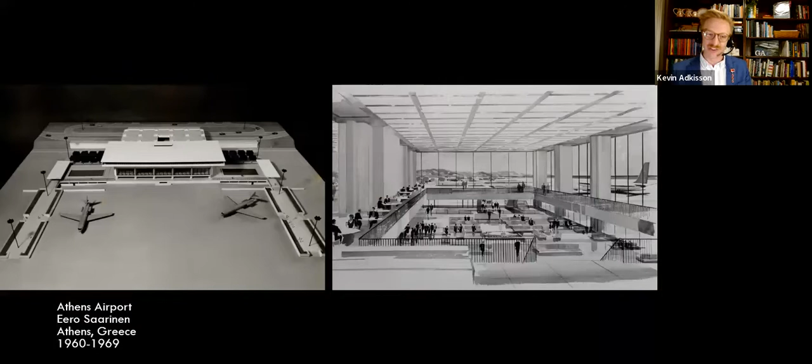He designs an airport that actually has outdoor boarding and a great temple-like form, with this almost Paul Rudolph interior of a great interior volume. This airport closed in 2001.

It was never really quite as celebrated or as original as the airports in America. At Dulles, or at JFK's Idlewild Airport, Architectural Forum said, in the great competition of terminals, it's quite clear who won. There was really no other airline who could compete with TWA, even though architects like Walter Prokosch designed the airline standards.

His great Worldport had this concrete overhang inspired by Tempelhof Airport, which would protect car passengers on one side and protect airplanes on the other. It also had curtains of warm air shining up through the street to enclose car passengers as they disembarked. It becomes obsolete almost immediately because jets can't fit under it.

Or at the American Airlines terminal, where the world's largest work of stained glass ran across an otherwise quite banal building. These structures were already being designed when Eero Saarinen was working on his airports. But as soon as Aline Saarinen starts the PR machine, airports start looking more like Eero Saarinen's work.

Most explicitly in Las Vegas, Welton Becket, the LA architect, builds a simpler version of TWA, using cut concrete shells as a sort of intersection. But notice that his system is really disconnected from the larger logic of the airport.

There's a very conventional terminal hall here, very conventional satellite fingers, and just one visual moment filled with a 40-foot long mural on the allegories of gambling. It's actually simply a casino within the airport.

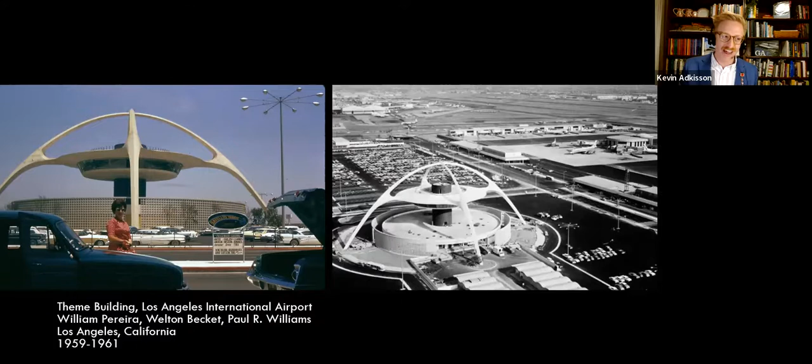When LAX does install the world's first moving sidewalks, they take that fear of factories and get the greatest dame of factory conveyor belts, Lucille Ball, to dedicate the moving sidewalk. As she walked down the sidewalk talking to reporters running beside her on the non-moving sidewalk, she celebrated this great innovation. And I think this is the last great innovation in airport architecture.

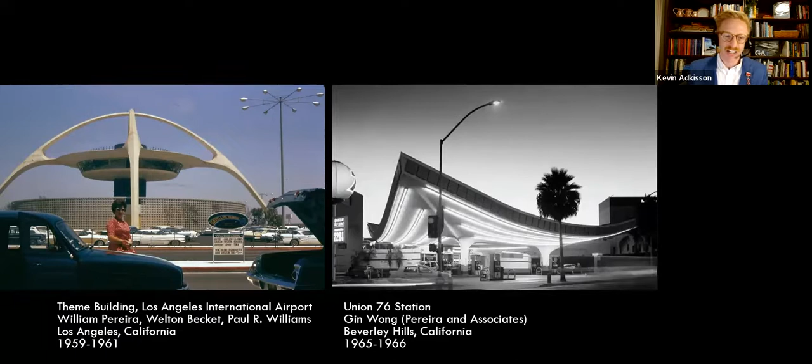The Googie style will continue on in Southern California, but it won't continue on in the architecture of airports. By 1970, and particularly with the deregulation of the airline industry by Jimmy Carter, airport architecture goes into, if not a dystopian wing, what Alastair Gordon, the great airport historian, calls the sterile concourse period.

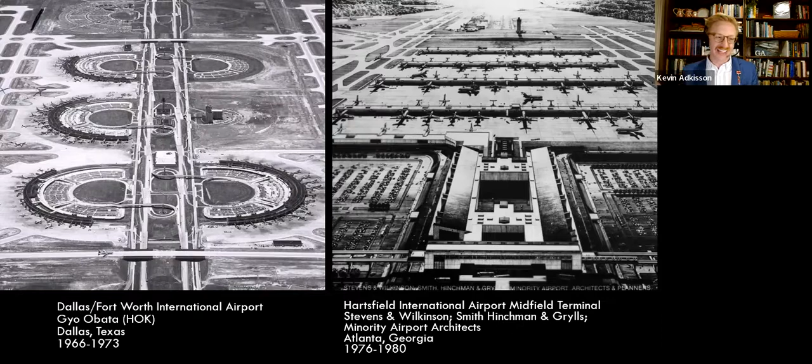The entirety of the island of Manhattan can fit within its 17,000 acres. It's a series of mile-long or mile-radius circles where you park in the center and go to a terminal. When they went to dedicate the airport in 1973, the mayor of Dallas asked where they'd dedicate it, and the airport said there's actually no center here, no room, no terminal, no moment like the flight center where our spirits will be lifted. This is just architecture as function, and they end up not even dedicating it here.

They find a place in Dallas to dedicate the new terminal, or in Atlanta, where the Hartsfield International Airport, designed by Stevens & Wilkinson, Smith, Hinchman, and Grylls, and minority airport architects, introduces underground trains that take you to midfield terminals. As someone who grew up flying in and out of here, there are few redeeming qualities to this type of factory concourse.

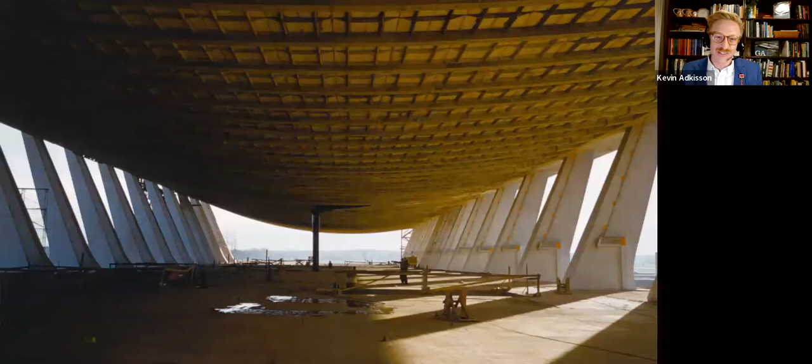So I think of the sort of optimism which Eero Saarinen's architecture embodied. In the months before he died, he visited Dulles Airport, and when he saw the cables being suspended, the columns, and it on its temple-like pedestal out in the landscape of rural Virginia, he said, 'I think this terminal building is the best thing I have done. Maybe it will explain what I believe about architecture.'

The airports were critically important to both Eero Saarinen professionally and to his legacy and his reputation. When TWA closed the terminal in 2001, the Port Authority slated it for demolition, as it has now done with every original building from Terminal City.

The architectural community springs into action to save the terminal building, but interestingly, so does the public. You have an architectural preservation campaign that is uniquely supported by members of a non-architectural set.